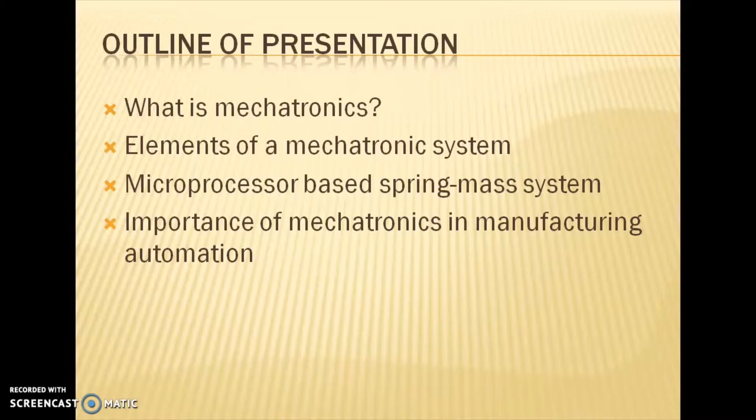Introduction to Mechatronics. Outline of the presentation: What is mechatronics? Elements of a mechatronic system, microprocessor-based spring mass system, importance of mechatronics in manufacturing automation. What is mechatronics? Mechatronics is a concept of Japanese origin adopted in the 1970s. It is defined as the application of electronics and computer technology to control the motions of a mechanical system.

Mechatronics comes from the two words, that is mechanism and electronics. Any mechanical system which is automated is known as a mechatronic system. Mechatronics is a multidisciplinary approach to product and manufacturing system. It involves the application of electrical, mechanical, control and computer engineering. In order to design a mechatronic system, it is necessary to have the knowledge of all the different disciplines of engineering. So it concurrently includes all the four disciplines.

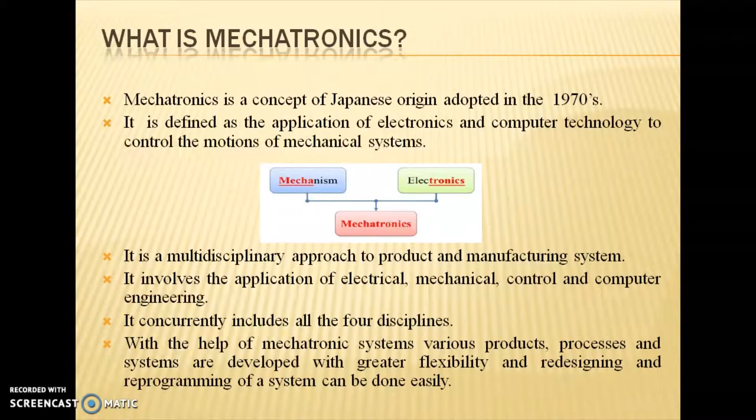With the help of mechatronic systems, various products, processes and systems are developed with greater flexibility, and redesigning and reprogramming of a system can be done easily. Mechatronics is widely used in our day-to-day lives. It is used in home appliances such as washing machines and dishwashers. It is also used in modern automobiles

in which the mechanical fuel injections are replaced with electronic fuel injection systems, leading to less pollution. It is also used in four-wheel passenger automobiles where there are airbags, parking sensors, anti-theft electronic keys. It is also used in the automation of manufacturing industries.

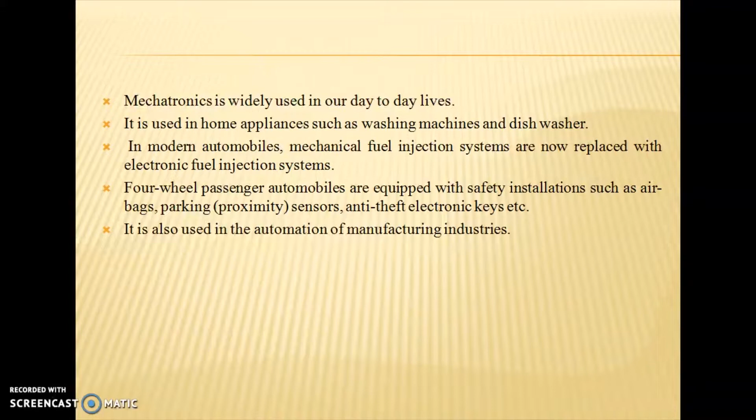Elements of a mechatronic system. A mechatronic system can be thought of as a box which has input and output elements, and a set of relationships exists between these elements. Say for example, if we take a spring mass system, the input to the system will be the force and the output of the system will be the extension, that is the displacement, and the system will follow Hooke's

law, that is F = -kx, where F is the force in Newton, x is the distance in meter, and k is the stiffness of the spring. So this block diagram shows a mechatronic spring mass system where force is the input and displacement is the output.

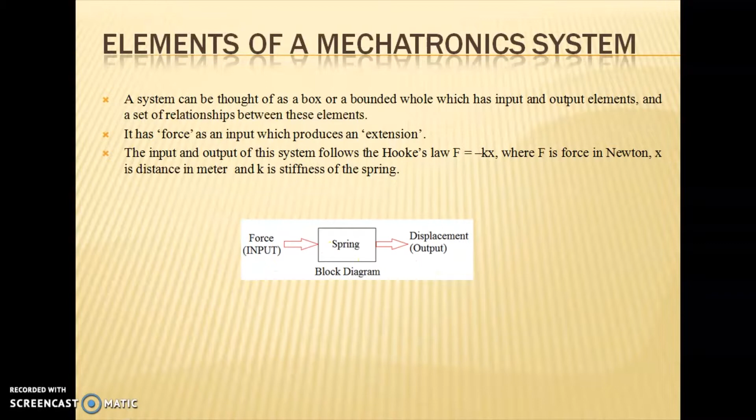Elements of a mechatronic system. The mechatronic system integrates various technologies involving sensors, measurement systems, drives, actuation systems, microprocessor systems, and software engineering. So this figure shows the components of a mechatronic system. The first is the mechanical system, then the sensor, then we have the converter, then the microprocessor, then the converter again, then the actuator, and finally the mechanical system.

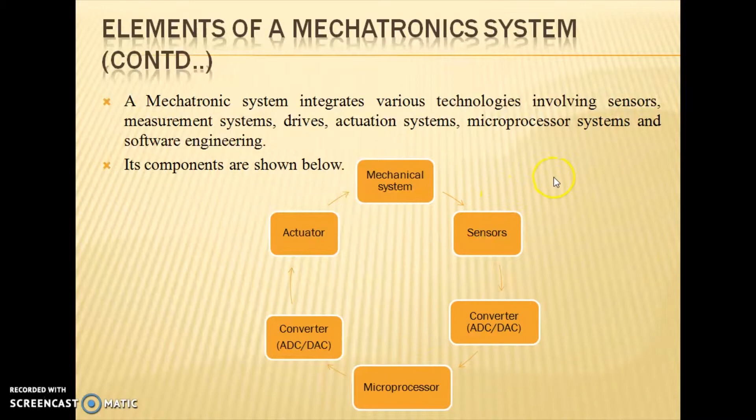To replace the mechanics of this mechanical system with an equivalent mechatronic-based system, the basic controlling element, a microprocessor, is required. A microprocessor processes the information gathered from the sensor system and generates signals of appropriate level and suitable kind, which will be used to actuate the required actuator, for example, a hydraulic piston cylinder for extension of the piston rod. The microprocessor is programmed on the basis of the principles of Hooke's law.

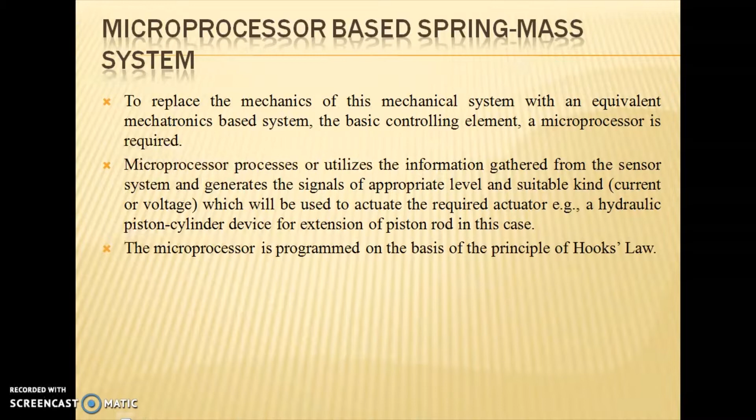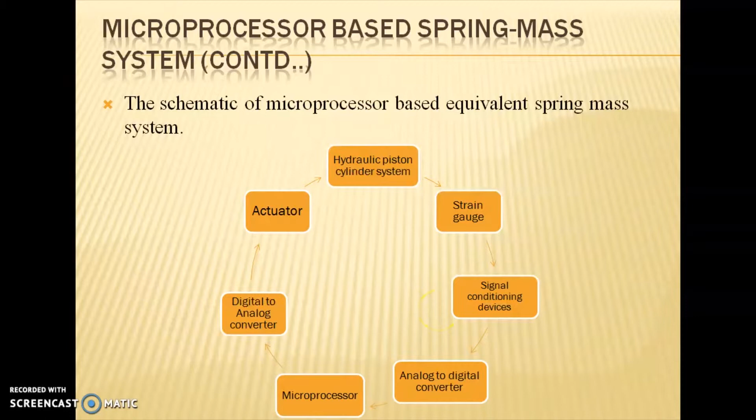So this is the schematic of the microprocessor-based equivalent spring mass system. The hydraulic piston cylinder system is a mechanical system. The strain gauge is a sensor which will sense the force. The signal from the sensor will be sent to the signal conditioning device. From the signal conditioning device, the signal will be sent to the analog to digital converter, then to the microprocessor. Then the signal will be sent to the digital to analog converter, and finally to the actuator and back to the hydraulic piston.

The input to the system is a force which can be sensed by suitable electromechanical sensors, that is the piezoelectric device or the strain gauge. These sensors generate either digital signals or analog signals. These signals are then converted into the right form and attenuated to the right level, which can properly be used by the microprocessor to generate the actuation signals.

Various electronic devices such as ADC, DAC, op-amps, modulators, and linearization circuits are used to condition the signals which are either received by the microprocessor from the sensors or sent to the actuators from the microprocessor. This mechatronics-based spring mass system has input signals in digital form which are received from the ADC and piezoelectric sensor. The digital actuation signals generated by the microprocessor are converted into appropriate analog signals. These signals operate the hydraulic pump and control valves to achieve the desired displacement of the piston rod.

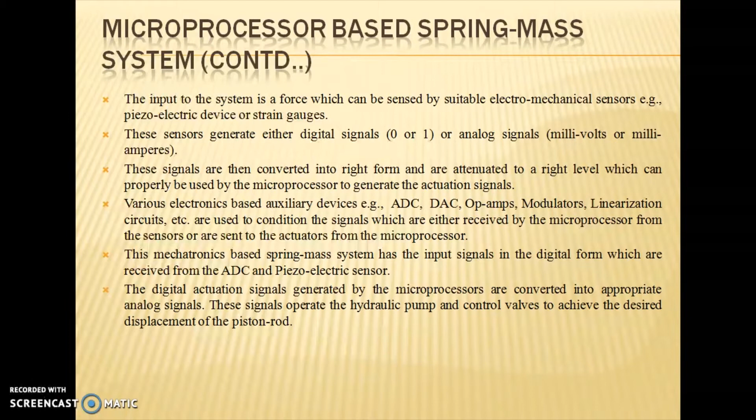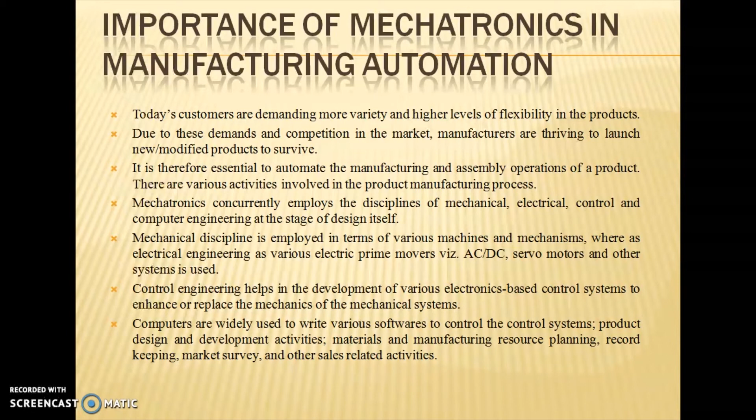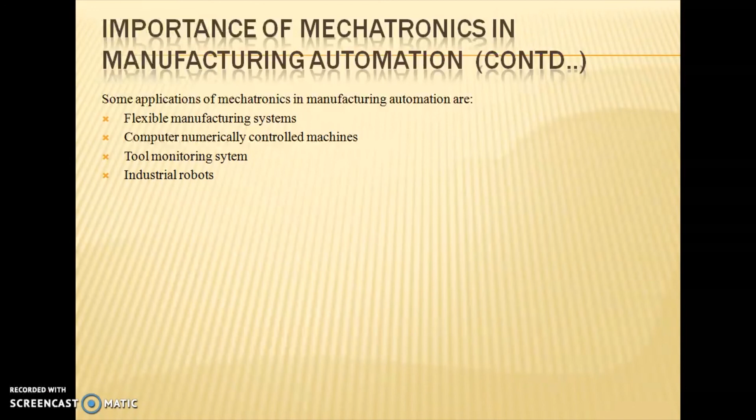Importance of mechatronics in manufacturing automation. Today's customers are demanding more variety and higher levels of flexibility in products. Due to these demands and the competition in the market, manufacturers are striving to launch new or modified products to survive. So mechatronics can be widely used for manufacturing automation. These are some of the applications in manufacturing automation: flexible manufacturing systems, computer numerically controlled machines, tool monitoring systems, and industrial robots.